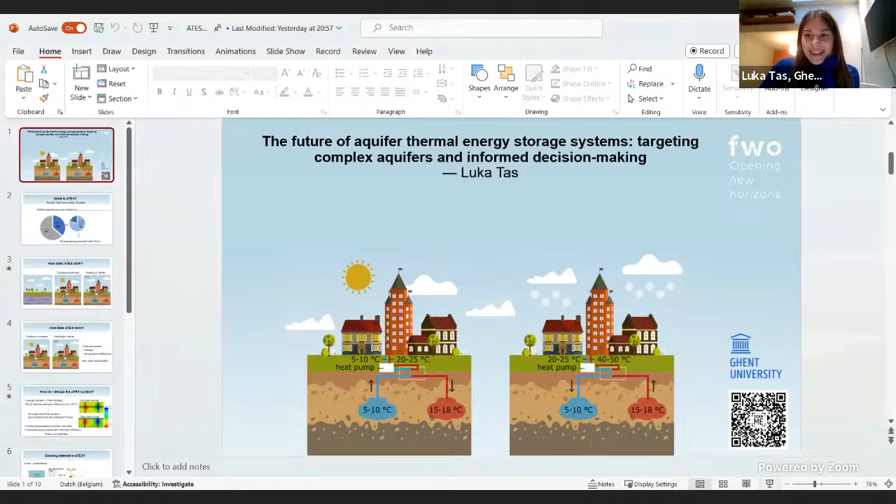Thank you, Anna, for introducing me. Can you see my screen? Yes, all right. So my name is Luka Tas, and today I want to introduce you to aquifer thermal energy storage systems and its future development.

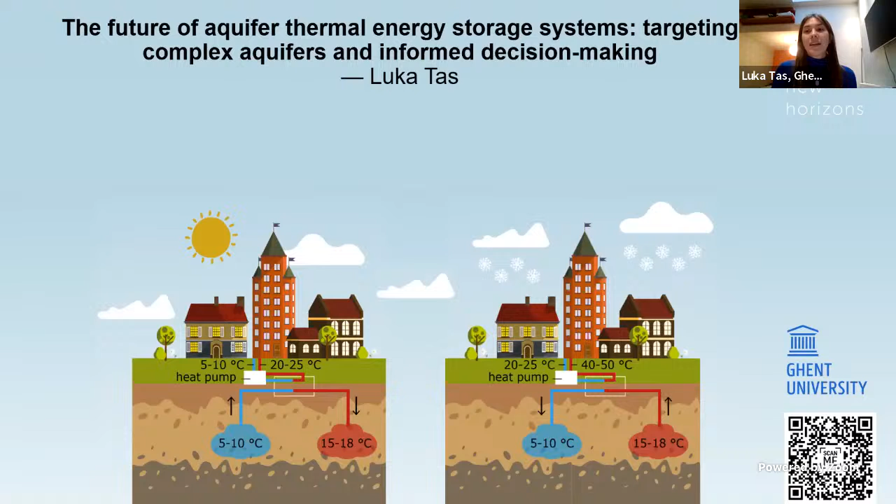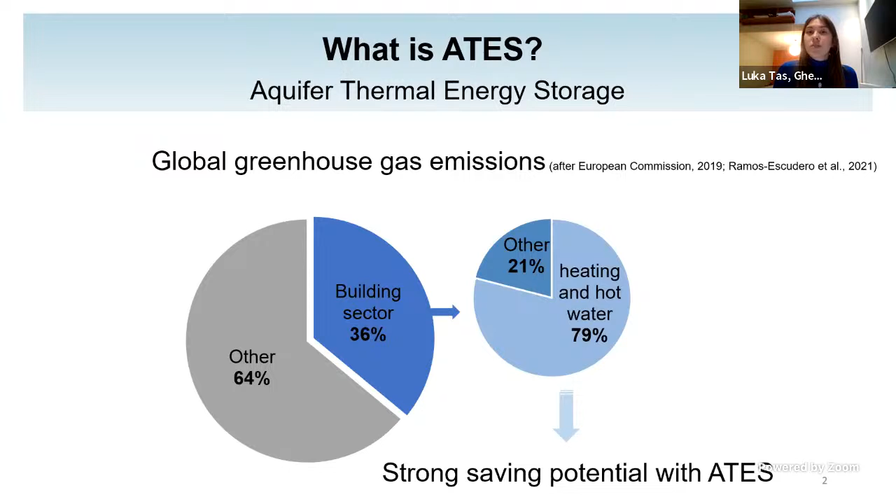First of all, we need to make sure we're all on the same page of what ATES, or aquifer thermal energy storage, actually is. ATES can provide heating and cooling to buildings in a green and sustainable way. Looking at the pie charts here, you can see that the building sector is responsible for about 40% of global greenhouse gas emissions, of which 80% is used for heating and hot water production. As you may know, the demand for cooling is currently increasing. Looking at it this way, you can see there's a strong saving potential if this thermal energy could be provided in a green way with ATES.

But how can ATES provide heating and cooling to buildings? Well, ATES actually uses the thermal energy of the groundwater present in the shallow subsurface, and with shallow, I mean up to about 200 meters depth. At this depth, the average groundwater temperature is about 10 to 12 degrees, and this is clearly not enough to heat a building. So with ATES, there's still something else at play.

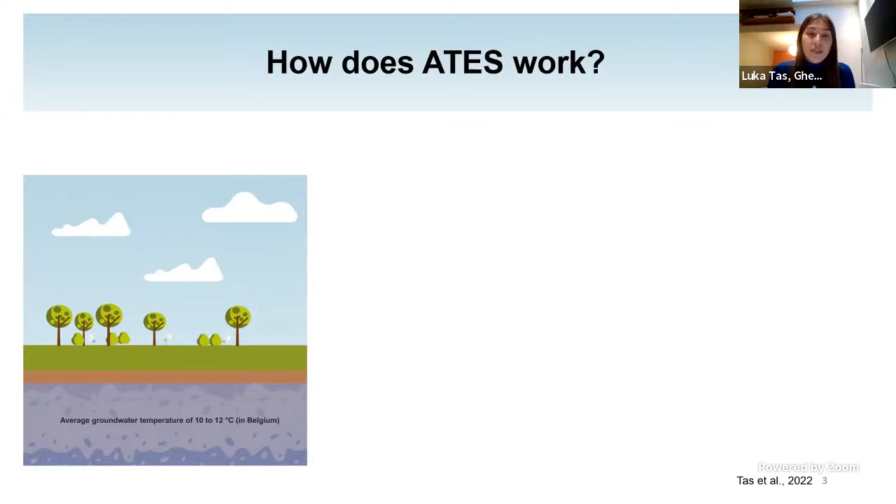ATES actually stores the thermal energy of the environment in the subsurface in order to use it when it's actually needed. To illustrate this, here you are looking at an ATES system in summer season, and in summer it's often too warm inside a building. So you extract water from the ground, and this water moves to the heat exchanger in the building. The water takes the heat from the inside environment, so the water warms up and the building cools down. This warmed up water is injected back into the groundwater reservoir, where you create a zone of warmer water.

In winter, the system is reversed to provide heating. You extract water from the warmer zone, taking advantage of the previously stored heat, and this water moves again to the heat exchanger. It gives its heat to the environment, so the building warms up and the water cools down again. This cooled down water is injected back into the aquifer, where you create a colder zone that can then be used for cooling in summer again. As you can see, the temperature of the warm storage area is still only about 18 degrees Celsius, and this is still not enough to heat a building.

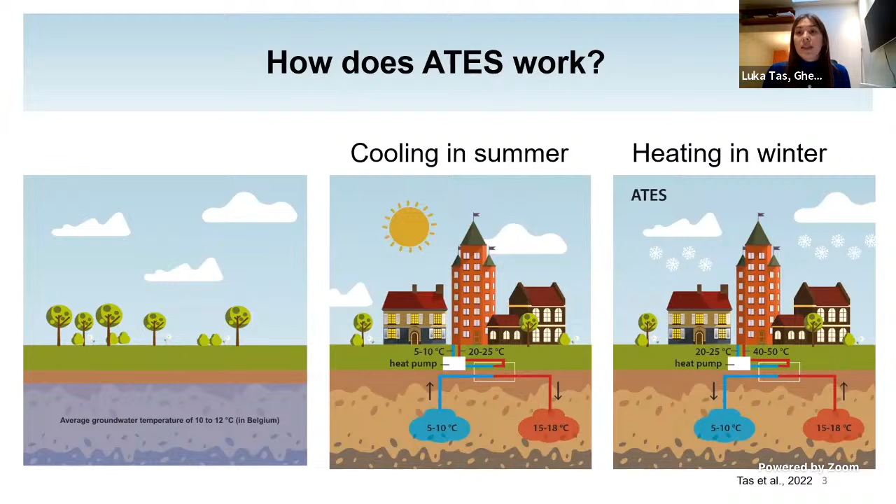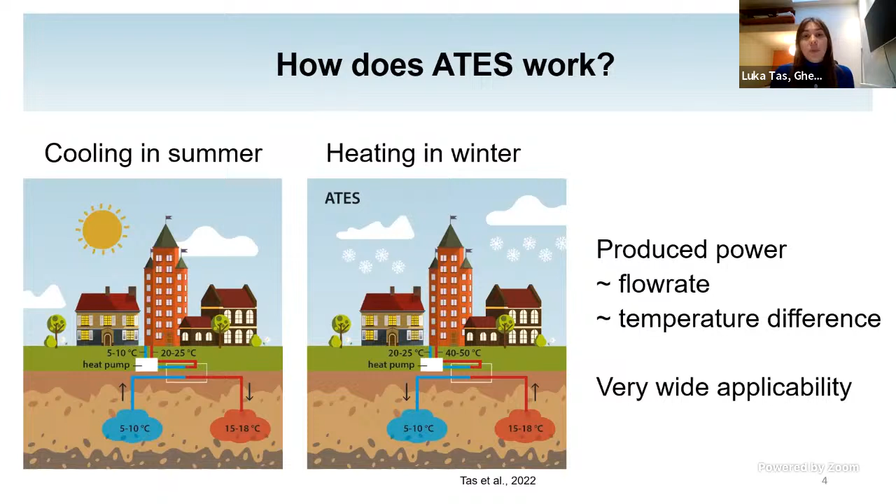There's also a heat pump in the system to further increase the temperature of the groundwater. With ATES, you can on average save about half a kilogram of CO2 per pumped cubic meter of water. The power you can generate with ATES is directly proportional to the flow rate of the system, so the amount of water extracted and injected, and also the temperature difference created in the subsurface. In general, for ATES it's sufficient to have a groundwater reservoir or aquifer in which you can pump or inject with a sufficiently high flow rate. This explains the wide applicability of ATES systems, and its great potential to mitigate CO2 emissions related to heating and cooling of buildings.

If you want to implement an ATES system in practice, it should always be first preceded by a feasibility study. The first thing you need to know is the energy demand of the building that needs to be fulfilled by ATES.

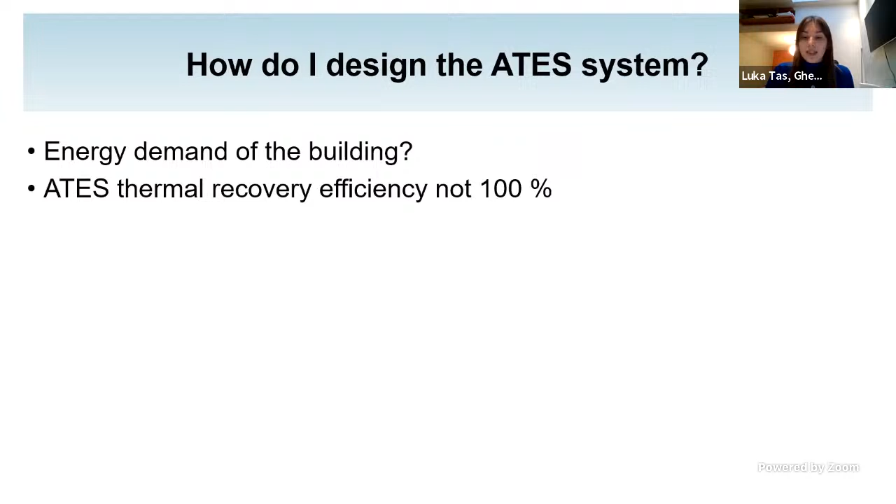Second, it's very important to take into account that you store groundwater at a certain temperature in the subsurface, but you won't be able to recover all of this thermal energy again. This is because groundwater flow and conduction, for example, cause the heat and cold to move away from the storage sites.

Therefore it's very important to know the groundwater flow and transport processes in the aquifer very well. This is why, often during a feasibility study, a three-dimensional model is created. This model is a representation of the study site with its hydrogeological and thermal transport parameters. It can then serve to simulate an ATES system for the desired length of time, and predict the temperature evolution with time. With this prediction, you can also calculate the expected power output of the ATES system and the thermal recovery efficiency.

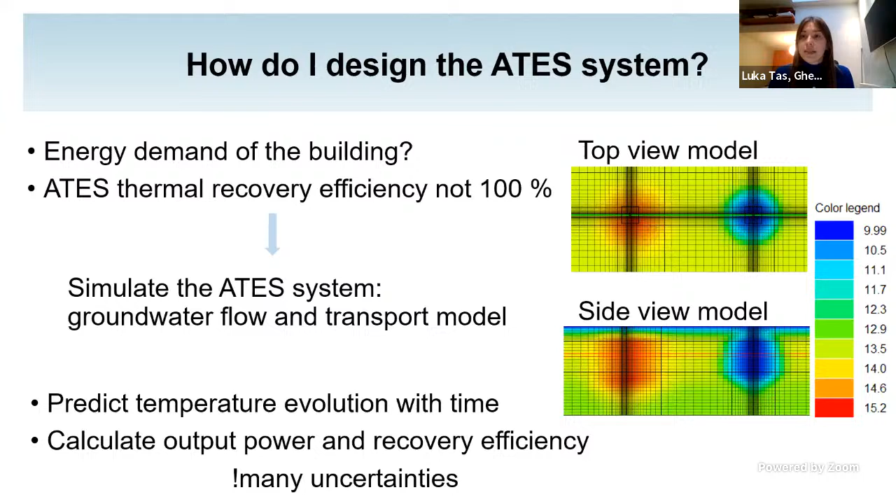Despite the apparent simplicity of making such a model, it's a very challenging and time-consuming task to make models that actually give reliable and realistic predictions, and there are also many uncertainties involved.

Despite these challenges, there are already many operational ATES systems in the world, so for the interpretation of results you can often also rely on experience. Most operational ATES systems are located in thick, productive aquifer layers because these are the most promising areas. This also explains its prevalence in the Netherlands, which is typically characterized by this kind of aquifer.

However, in many other European countries there are more complex aquifers, which are more at the limit of suitability for ATES. Because the potential for ATES has already been extensively proven, and as we're still facing challenges to provide our energy in a green and sustainable way, there is currently a tendency to also target these more complex aquifers for ATES. This is also aided by government incentives to invest in green energy, and by rising energy costs, which favor investment in ATES systems.

Because more and more ATES systems are coming, this brings its own challenges for the future. First, I want to talk about competition between systems. When you have more and more systems in a certain area, they could be placed too close to each other, and this might cause interactions between individual ATES systems, which is potentially detrimental to the efficiency of each system.

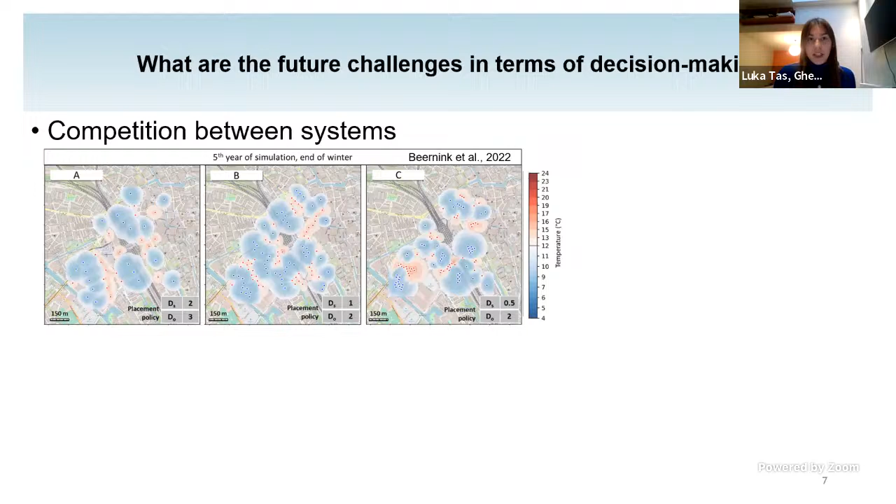This is something that's actually already encountered in the Netherlands. So in the future it's very important to take this into account and develop some kind of legislation so that we can optimize spacing between individual ATES systems, to avoid this competition and also encourage district heating plans.

If you want to target more complex aquifers in the future that are at the limit of suitability for ATES, you need to take into account that the risk of failure is significantly higher. Then it's not enough anymore to rely on experience when designing the system, but better informed predictions should be made. However, the current methods in industry have poor predictive capacities and are unable to estimate this uncertainty.

In practice, often a field test is carried out, and you try to fit your model output with this field test by adjusting your model parameters. This is called a deterministic calibration. However, there are some issues with this approach, because it does not take into account that the field test is only representative for a small part of the study area. It also does not take into account that multiple model realizations with different parameter distributions could actually fit this field data.

To be able to move towards models in the future which can serve for real risk assessment, we need to develop methods that have better predictions while also acknowledging uncertainties that are present. At the basis of these new methods will probably be stochastic approaches, where you explore the entire ensemble of different solutions. To illustrate this, here you're looking at model output showing temperature evolution with time for two cycles of an ATES system.

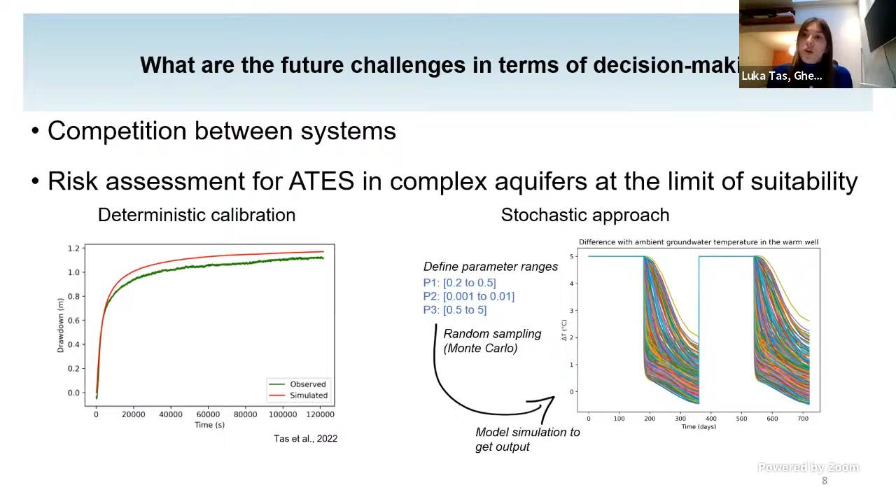With further statistical data analysis, you can then make more accurate long-term predictions, also taking into account the short-term field data, while still having an idea of the uncertainty that is present.

Finally, I want to talk about the increasing complexity of data and models expected in the future. As I mentioned, there are already many operational ATES systems in the world, and a lot of them have a lot of monitoring data available. The challenge in the future lies in how to use all of this data to optimize future new ATES systems, in order to reduce the cost of the initial feasibility study of new ATES systems.

So that we can promote the further use of ATES in the future. Also, if we want to use more stochastic approaches in the future, this will also increase the complexity of models and data. I expect that the methodology with which we solve prediction problems in earth sciences will evolve along with this in the future.

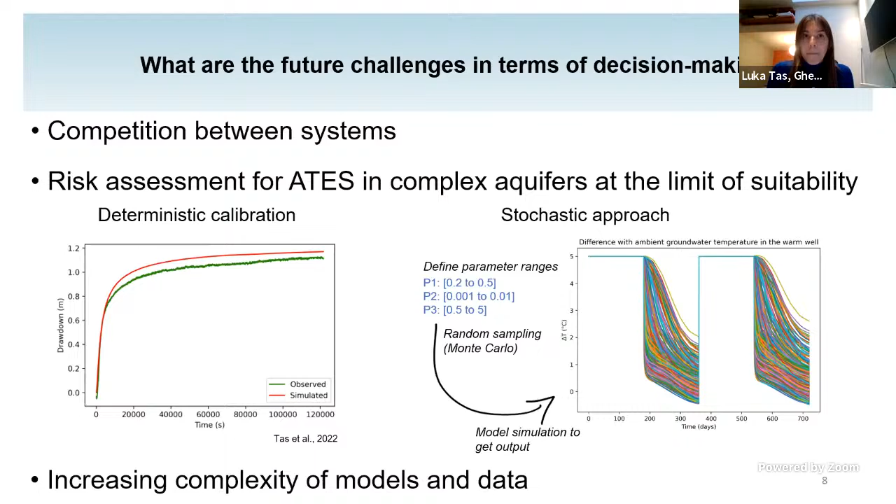To end this presentation, I would like to emphasize that decision-making should always be based on sound scientific approaches. As our research about ATES systems advances, we should take into account that there's still a gap between science and practice that we should try to bridge in order to actually make a real difference in practice.

Here are still the references. Thank you for this presentation and for your attention.

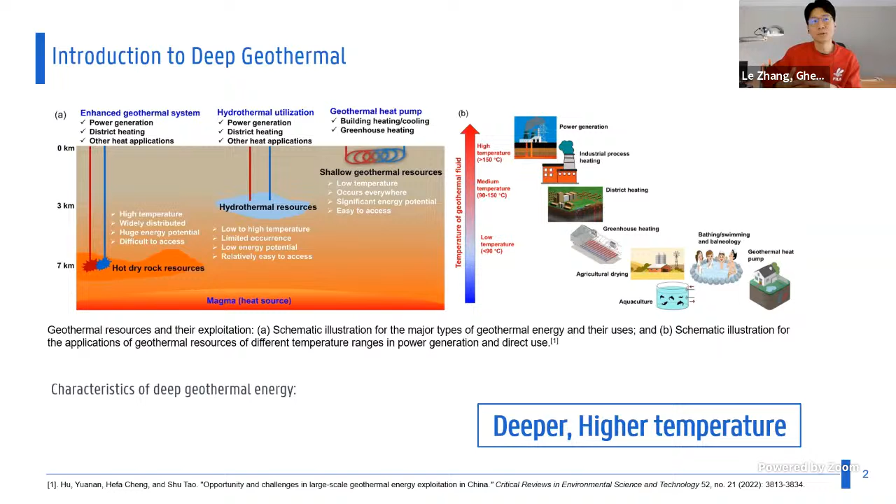Generally, geothermal energy can be categorized into shallow geothermal and deep geothermal. Deep geothermal includes deep hydrothermal resources and also ultra-deep geothermal, such as hot dry rock resources. As shown in this figure, you can see two very significant characteristics of deep geothermal: they are deeper and have a higher temperature. These two types of deep geothermal differ a lot between the hot dry rock resources and the hydrothermal resources, mainly due to underground water, because the heat transfer medium is usually water in the geothermal system. So the hydrothermal systems have naturally high temperature reservoirs.

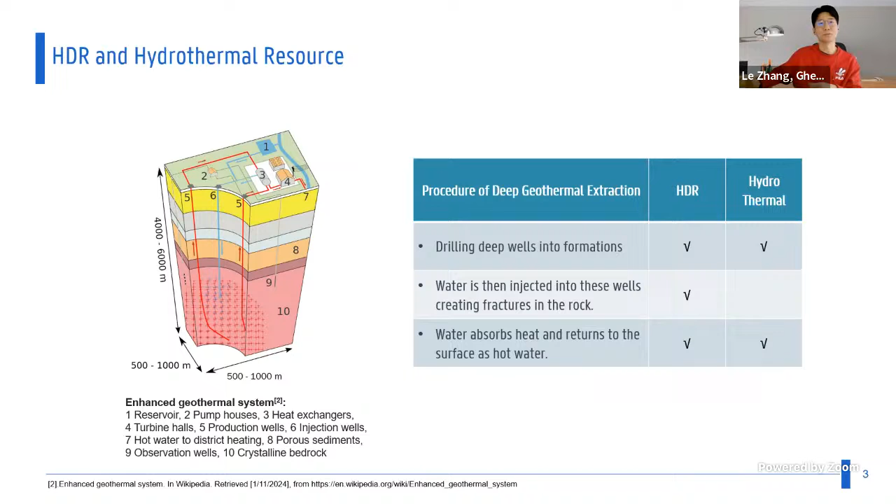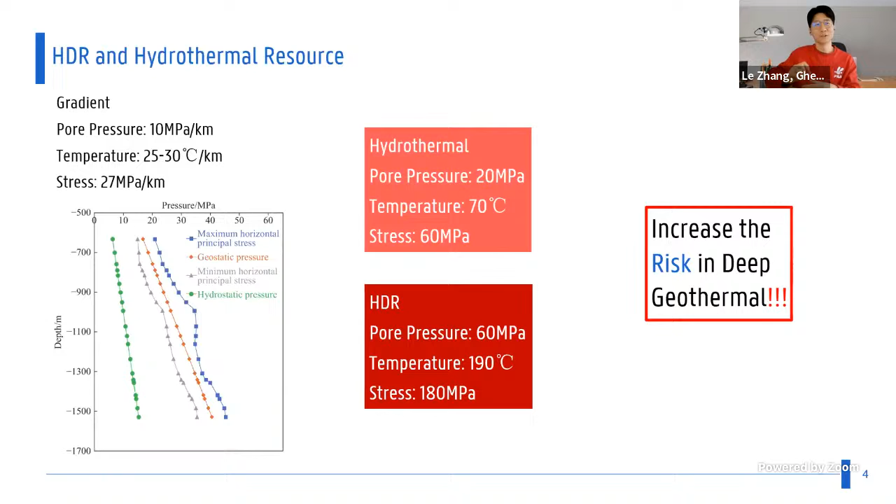In the underground and deep geothermal, we need to consider the complex physical environment of the reservoir. We all know the deeper, the higher the temperature, also the higher the pressure and stress. The injection of cold water during geothermal extraction will always disrupt the original physical balance of the environment, and normally it can increase the potential risks.

In deep geothermal, the temperature, pressure, and stress in that environment are always interconnected. We call it the thermal hydromechanical coupled effect. The risk always comes from the mechanical response of the reservoir. Normally, both the decrease of temperature and an increase in pore pressure can reduce the effective stress within the reservoir. In rock mechanics, we use a Mohr circle to represent it.

If the stress in the reservoir shifts but does not reach the yield surface, then it can be considered safe. However, if the stress exceeds the yield surface, especially in the presence of faults, it can lead to a very big risk.

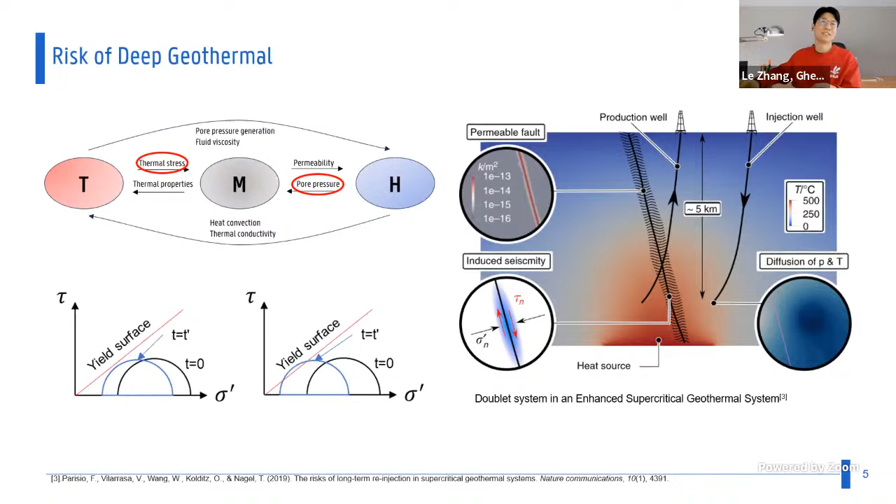So what's a very big risk? The answer is earthquake. Seven years ago in Pohang, South Korea, a 5.5 magnitude earthquake occurred. It's the largest and most destructive earthquake ever associated with an enhanced geothermal system. This event led to the complete shutdown of the EGS project there, and it was considered a potential game changer for the global geothermal industry.

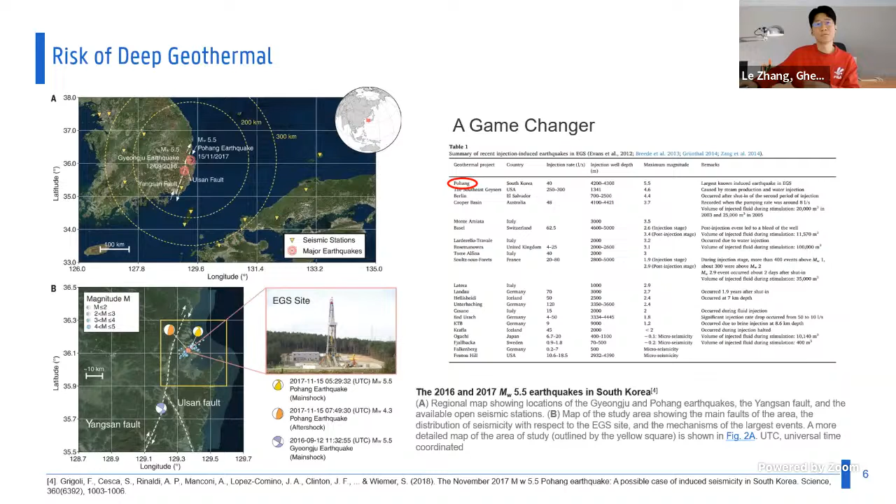Now we have enough information about deep geothermal, especially the risks. Now I'm going to move forward, and I would like to introduce a new concept. How can we extract geothermal energy in deep mines?

In theory, extracting energy in deep mines, especially the geothermal system beneath the existing mining system, can be a mutually beneficial situation. On one hand, the geological data from existing mines can be a reference for geothermal, and the shaft and tunnel can reduce the cost of geothermal drilling.

On the other hand, the injected cold water can help cool down the mining areas, controlling the heat hazard. So for this conceptual system, our primary concern still remains the safety and stability of the system, as we previously discussed - safety is always a fundamental requirement of a system.

Given that deep mine environments are often around 1 kilometer underground, in this system we are dealing with hydrothermal resources - we don't think about the hot dry rocks. So the likelihood of induced earthquakes is nearly zero, but we cannot ignore the impact of the mechanical response from the geothermal system on the stability of the mine gallery.

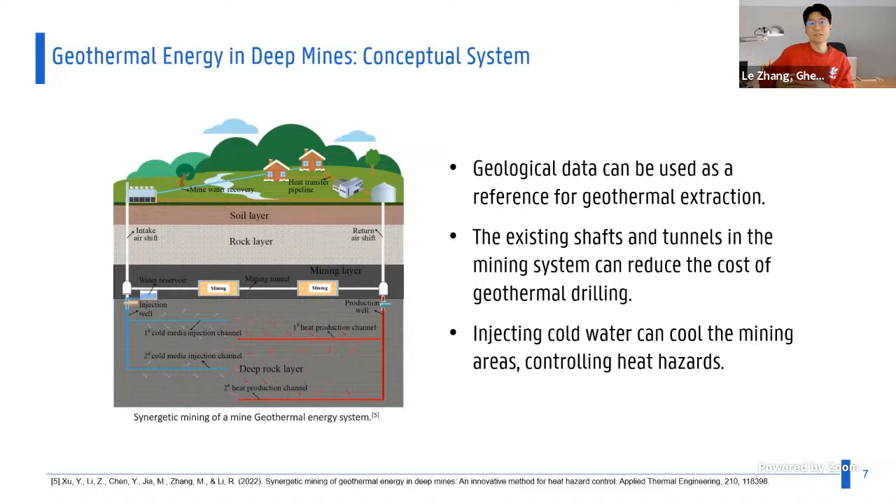So if we want to design this conceptual system, we have to pay a lot of attention to the stability of the mine gallery, also the temperature of the gallery to check the cooling effect and the production temperature. Then the next question is, how can we connect the reality with the conceptual?

We can employ the most commonly used method in geothermal research, the numerical modeling. A successful numerical model is like a calculator. You provide the model with the information you have, which includes a lot of parameters. In this model, it should include the thermal parameter, hydraulic parameter, mechanical parameter, and the design parameter.

There are a lot. And in return, the model will provide you with the answer you want, which includes the gallery stability, the gallery temperature, but also the production temperature about the project. It's quite a straightforward method.

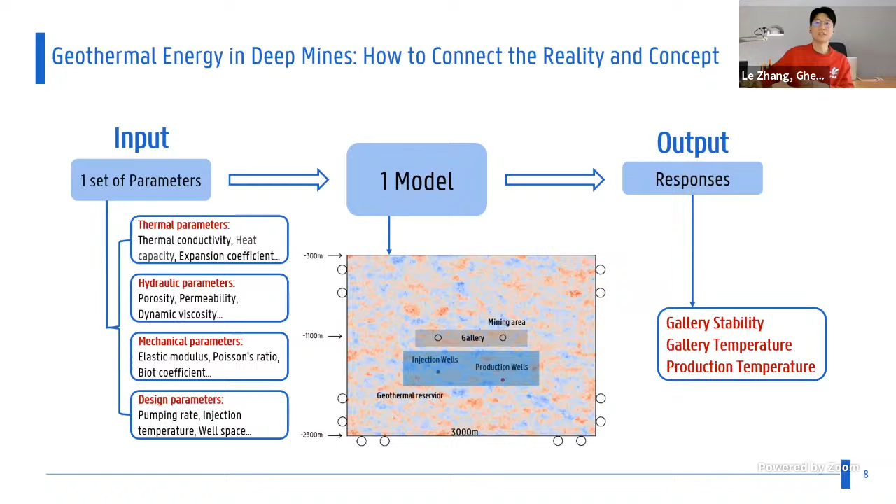But in reality, we want to use a model to give a suggestion for decision making, such as determining the location and depth of our geothermal system - where and how deep we can build it to make the best decision. We always have to face a big challenge.

It's still the uncertainty. In numerical modeling, we deal with a lot of input parameters, each with a range of values that can influence the responses. The key question is how to select the most appropriate parameter range to make an accurate decision and achieve the desired results. This is our primary concern.

Therefore, I'm going to introduce a simple approach to addressing this question and making the best decision. Instead of relying on just a single model, we increase the number of models to X. X could be hundreds or thousands, it depends.

Within the range of possible values for each parameter, we can select X sets of different model inputs. Then we run the model X times for the stochastic simulation. We generate a large number of responses. Among these responses, some galleries may remain in a very stable situation.

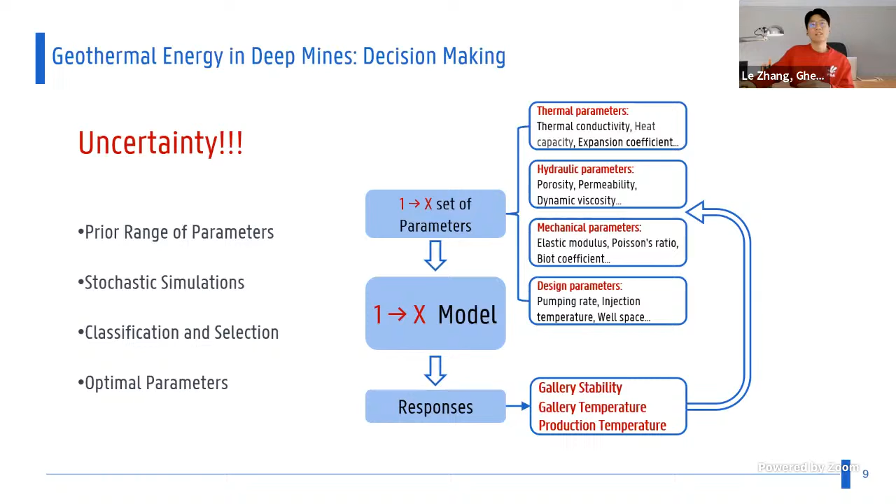This approach is quite straightforward and simple, but it is computationally intensive. We also employ some machine learning methods to optimize the deep geothermal model in a faster and simpler way. If you are interested in the method I'm doing now, please feel free to contact me by email. Thank you very much for your attention.

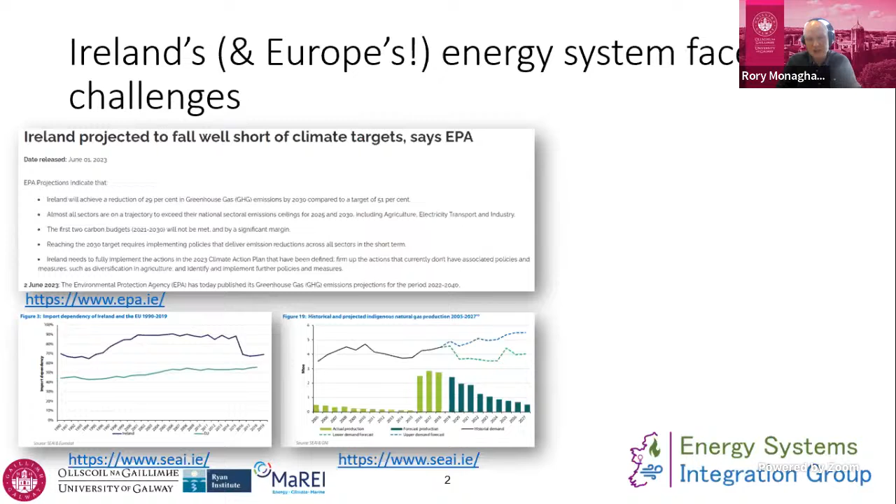We're all behind on meeting our emissions targets. We are all trying to deal with issues around the security of energy supply. These graphs show the quantity of energy used in Ireland and Europe that is imported. We've got projections for Ireland for how it might continue into the future. We are very exposed in Europe, but extremely exposed in Ireland because we have traditionally virtually no fossil fuel resources. We've also had issues over the last couple of years with the physical security of supply, growing energy demand, and relatively stagnant—or in some countries falling—energy supply.

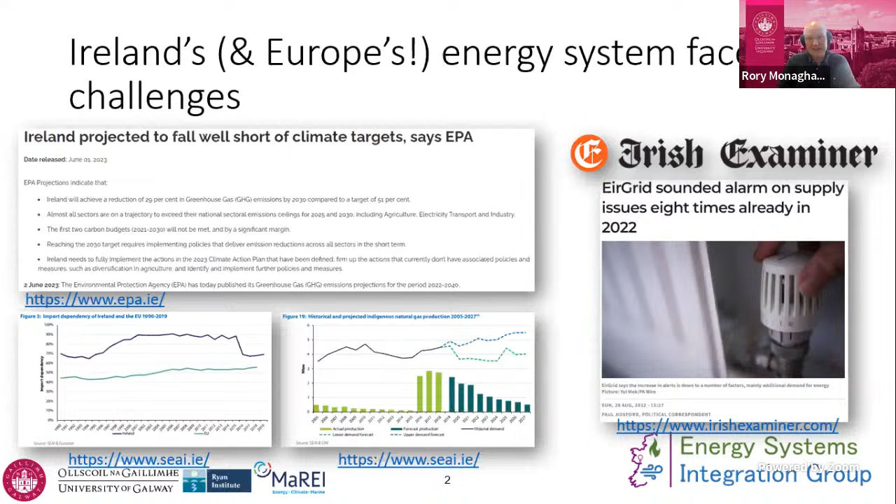So how can we aim to address all of these issues that really are very important for society and for the economy as well? The first, most important, and cheapest route to decarbonizing our energy system is simply to use less energy.

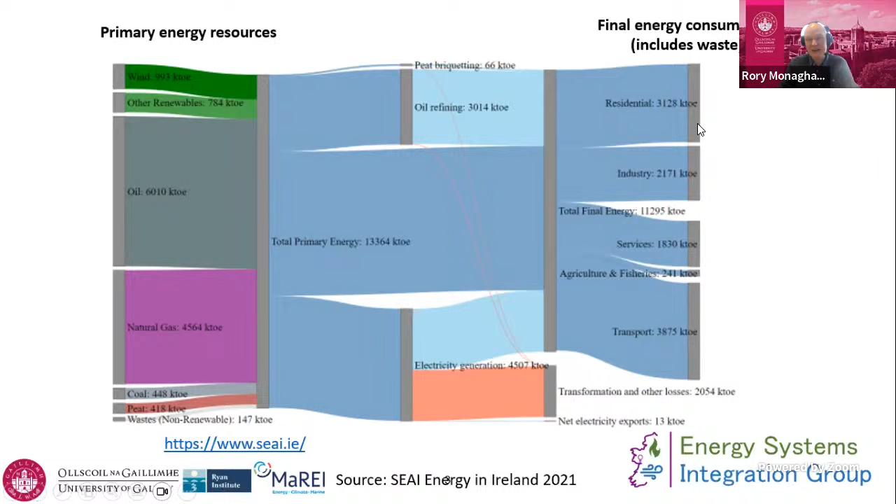This is a Sankey diagram showing the flow of energy from raw materials on the left-hand side to end uses on the right. The problem with these end uses is that most of the energy flowing into them in our economy is wasted. The majority of energy used for transportation is wasted because combustion of fuel in cars is an inefficient process. We can say similarly for houses, industry, and other types of energy use. So if we can improve the efficiency of energy use on the right-hand side of this graph, we have to bring in less energy resources on the left.

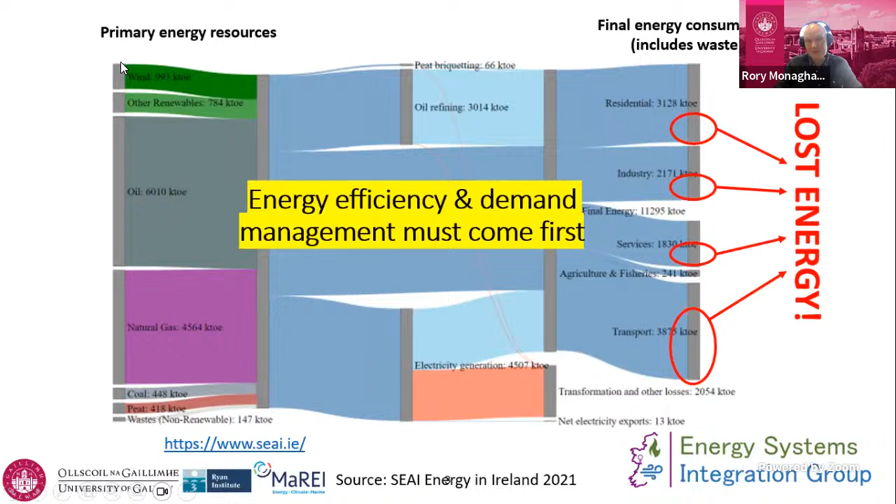We need widespread electrification of as much as we can, as quick as we can. The two obvious routes for electrification are electrification of home heating and cooling through the use of heat pumps, and the electrification of small-scale transportation through the use of electric vehicles. And we have seen that they have started to make a real impact over the last few years.

We also need, if we are building up these uses of electricity—because the reason we are talking about electrifying is that we have seen it is easier to decarbonize electricity supply than it is to decarbonize other elements of our energy use. So if we use more electricity, we need to generate more electricity. And that means, certainly in the part of Europe where I'm based, using more wind energy, using as much solar energy as we can get our hands on.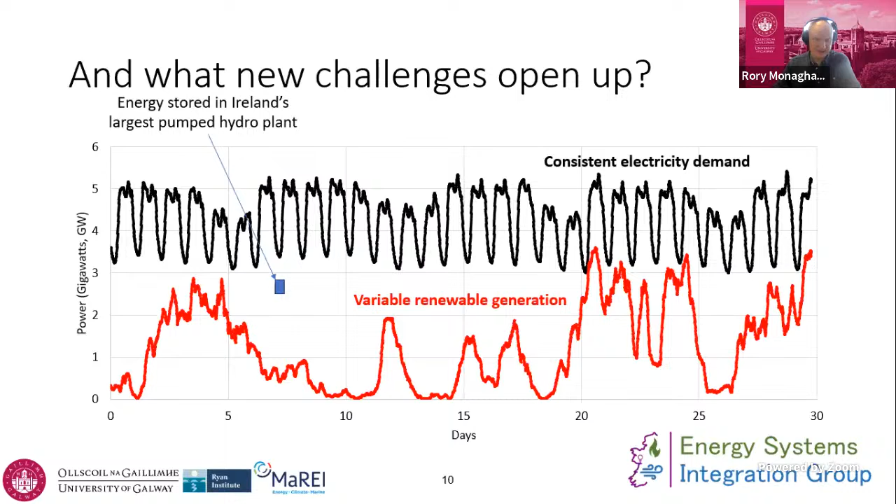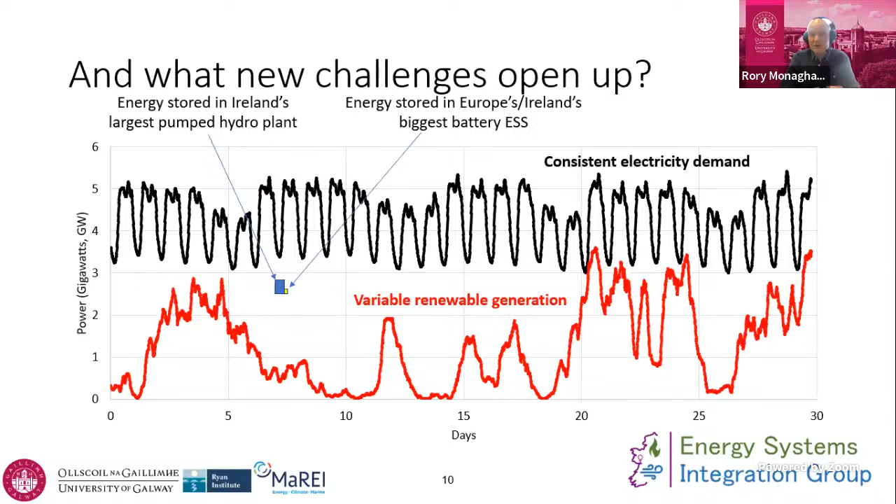And this maybe will focus minds even more. This is the largest battery storage plant in Europe, which was built in Ireland a couple of years ago, and it is an even smaller amount. So while batteries are extremely important in balancing instantaneous supply and demand on the grid, they are not very large energy storage sites. So how can we address these problems that are going to come online as we move to a zero carbon energy system?

Well, green hydrogen is potentially a missing link to this. Green hydrogen involves the use of renewable electricity to split water in a device called an electrolyzer, to transport that hydrogen to where it's needed, either through pipes or through ships or through trucks. And the fact that we have a chemical means of energy means that we can store that energy from times when we have the renewables to times when we don't.

Because the thing with energy demand is that we generally have no say in when energy gets used. Energy is used when it's needed. Now, that can be controlled to some extent by demand management, but it can't always be. So once hydrogen is produced and stored, it can be used across a number of different sectors to decarbonize.

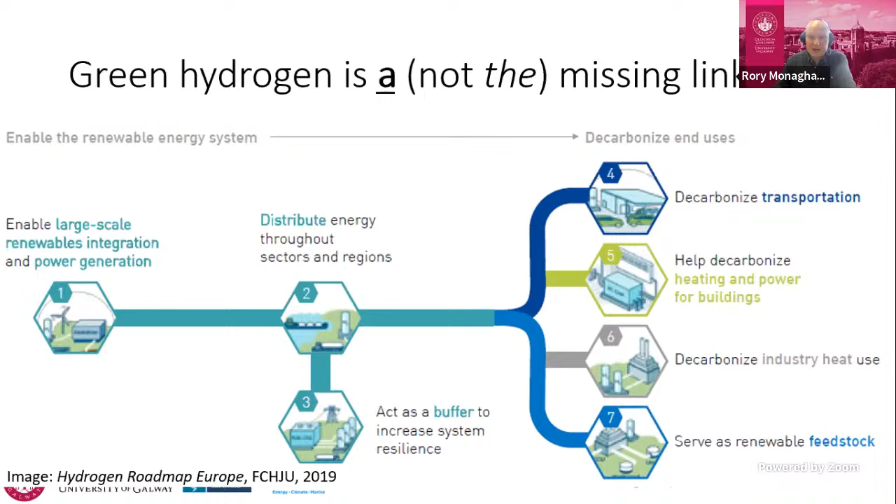So we've done some work over the last few years trying to quantify this, and we've been coming at this from an Irish perspective. The results are comparable to other countries, but maybe not directly so.

We envision that by 2050, about 8% of the electricity generated in Ireland could come from hydrogen burned in gas turbine engines, the same type used to generate power right now from natural gas. About 12% of heating could come from hydrogen in Ireland.

In transport, there's a mix of different options. We're projecting very small use of hydrogen in private cars, but larger use in harder to decarbonize sectors such as shipping, trucks, and heavy duty public transport.

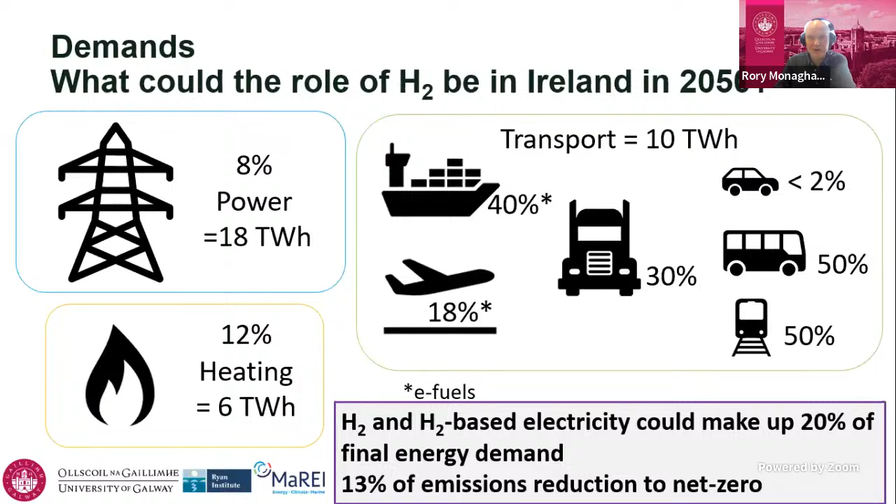We've also started looking at how hydrogen can fit into our electricity sector. Returning to our pumped hydro storage site represented in blue and our battery storage site represented in yellow.

Ireland and the Northern Irish government are jointly starting to investigate whether hydrogen could be stored in a geological salt cavern structure in Northern Ireland that could store energy for the entire island of Ireland. The minimum estimate of how much energy could be stored in that cavern is shown by this blue box.

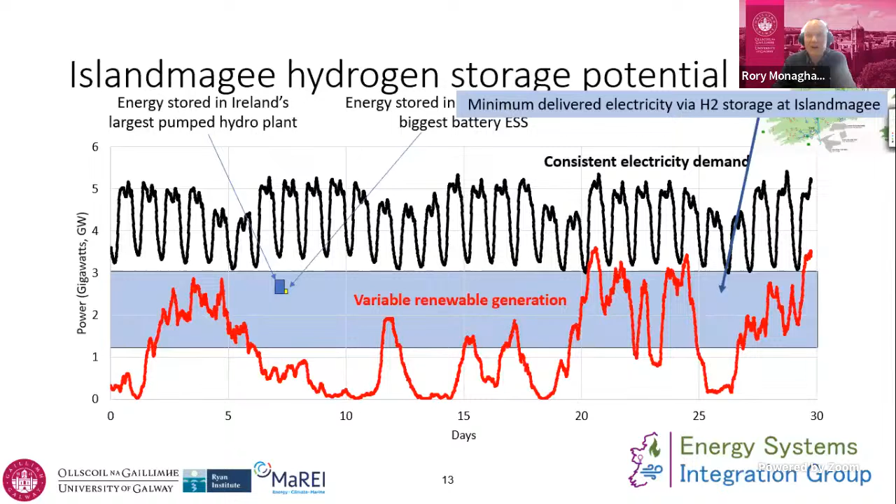It's orders of magnitude larger than the amount of energy currently stored in our pumped hydro plant or in our large-scale battery storage plants. So there is a huge potential storage resource out there for hydrogen in geological settings.

One of the issues with hydrogen is that we currently don't use it much as an energy resource. It's used in certain industries, but those of us working in hydrogen are now having to consider both the supply and demand of hydrogen together, bringing these on stream together.

This is currently being promoted through the use of hydrogen hubs or hydrogen valleys. This represents work we've been doing with the Irish government and Northern Irish government on linking up potential areas of supply, for example where we have large-scale renewable resources, mostly at coasts, with where we could potentially use hydrogen—in industry in Ireland, cement production, and power generation.

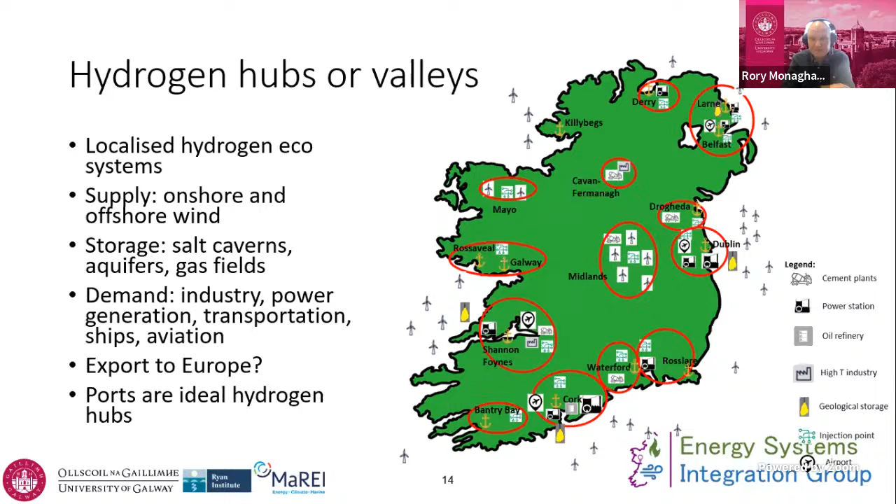We're also looking at how Ireland can connect to become an exporter of hydrogen to Europe. One route is the European Hydrogen Backbone, a pan-European project to convert the current natural gas pipe network into 100% hydrogen piping networks.

This wouldn't be to deliver hydrogen into people's homes, but for moving large-scale amounts of hydrogen from areas of production, where the renewables are, to areas of demand, where we have heavy industries. With a network like this, we'd envision hydrogen produced by wind in Northern Europe and by solar in Southern Europe, moved by pipelines to the central hub, the industrial heart of Europe.

What I want to finish this presentation on is to say that we're aiming to do that right here in Galway, on the west coast of Ireland. We've received funding from the European Commission to build what's called a hydrogen valley.

We're aiming to produce hydrogen at a wind farm here in Ireland and use that to power hydrogen-powered intercity buses and trucks, and eventually boats and small aircraft serving the islands off the west coast of Ireland. This project started just this month, and we'll be running it for 5 years. We hope to keep everyone updated on how it goes as we try to decarbonize these really hard to decarbonize parts of the Irish economy.

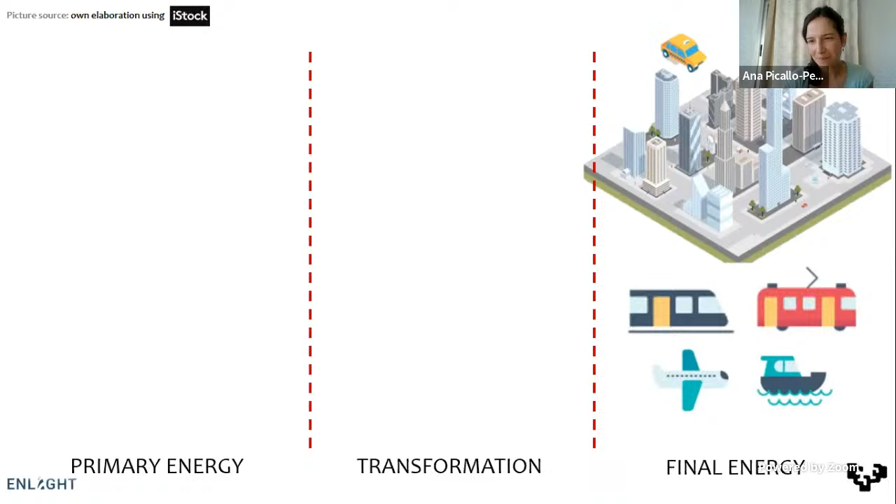The energy that we use is called final energy. And as Rory already showed us in the Sankey diagram, the three main consumers are buildings, transportation, and industry. All that final energy that we use in buildings, transportation, or industry comes from primary energy obtained from natural resources, which can be divided into renewable or non-renewable resources. In between primary energy and final energy, we have power plants, transformation plants, which take the primary energy and convert it into the final energy in the way we use it.

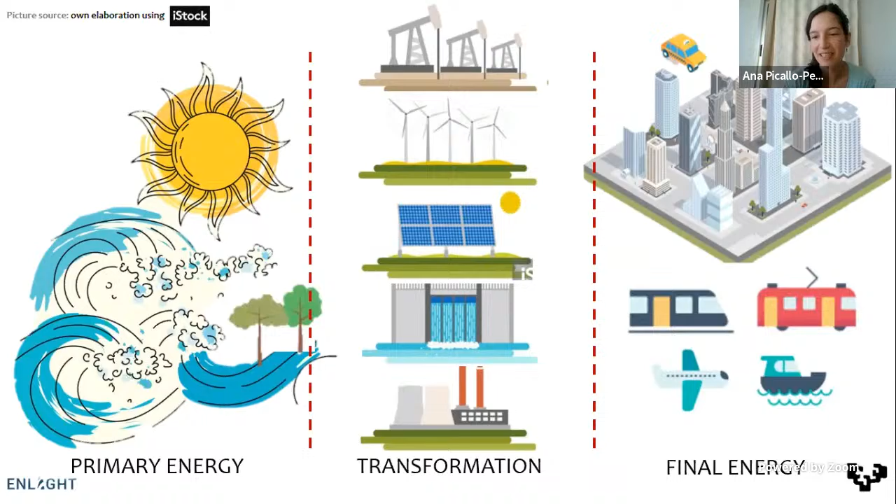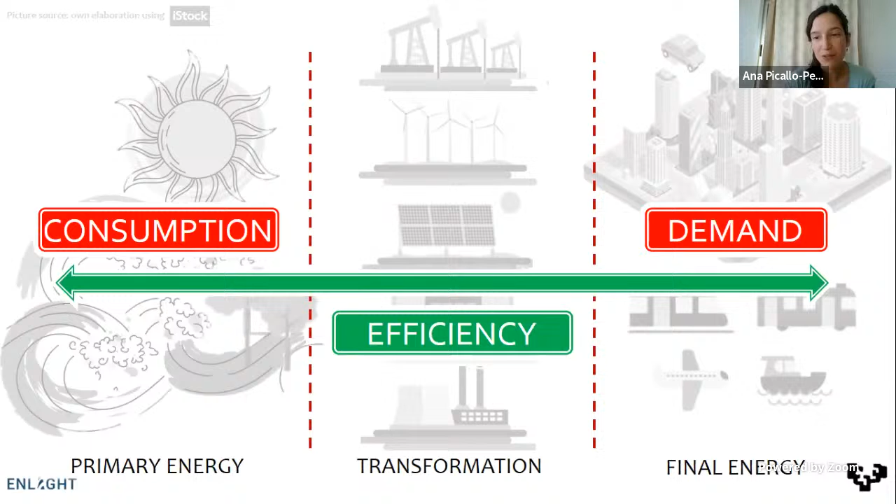So it's very important to define the difference between the demand that we need for our use and the consumption of natural and primary energy. In between both of them, what we have is the efficiency of the energy transformation itself.

And what should we do? As Rory already says, the idea is to decrease the consumption of natural resources in order to decrease non-renewable resource consumption, because the depletion is something commonly known, and everybody knows that we need to decrease that consumption in order to contribute to a zero or neutral CO2 emission world and a more balanced world.

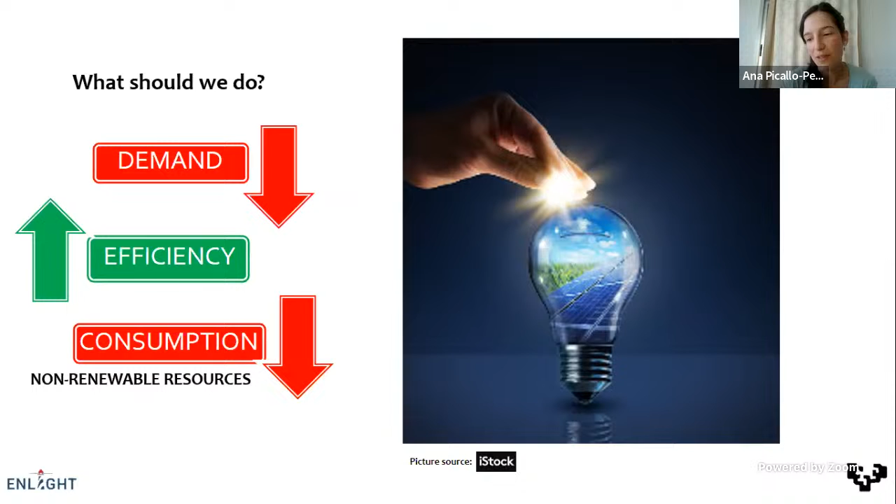According to that, in order to reduce consumption, we need to reduce our demand, our habits, our energy consumption profiles. But many times the demand cannot be decreased at all, and instead we are increasing it. So once we decrease the demand as much as possible, the other way to decrease consumption is to improve the efficiency of the energy transformations.

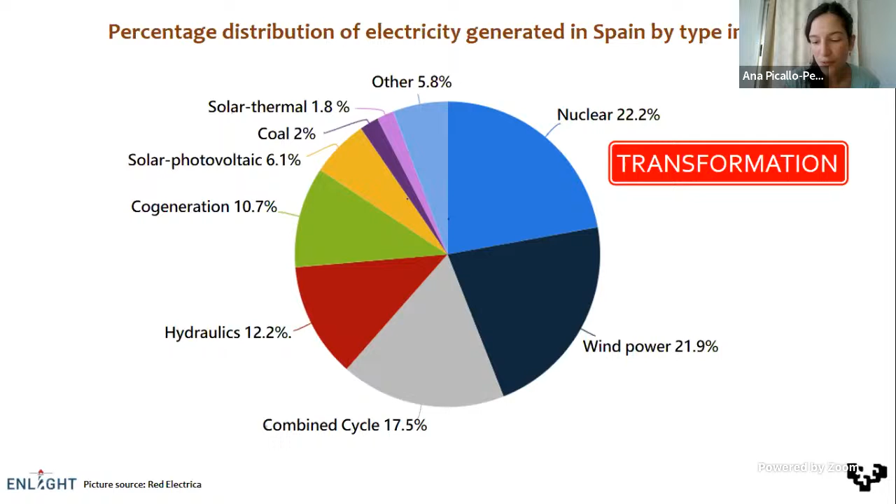This slide only shows the percentage distribution in Spain by 2020, according to the energy mix of that moment. As we see, almost a fourth was related to nuclear power, and then wind, solar, and hydraulic renewable energies contributed to creating the electricity at that moment.

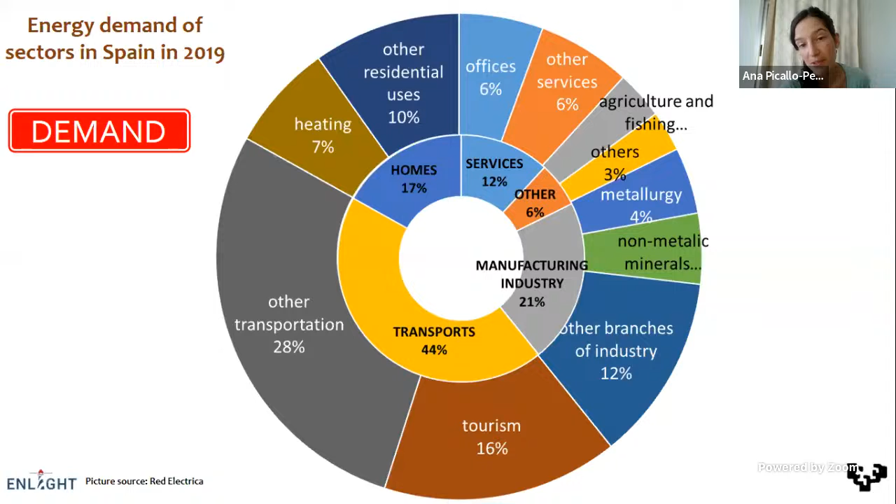But according to the demand, the Spanish demand in 2019, the main consumers were industry, transport, and homes and services. This picture is similar in Europe. As in Spain, the city's final energy requirement, meaning homes, buildings, and the tertiary sector, is almost one-third part. In Europe, it accounts for 40% of the total energy consumption.

Therefore, we need to lower this kind of demand. According to buildings itself, which are the energy demands? It's commonly known that we have heating demand and electricity demand. Heating demand includes heating requirements in wintertime and refrigeration in summertime, more so now that global warming is so high.

We also have energy demands for ventilation. Ventilation is an energy demand that requires a lot of energy, since we throw out the already acclimatized indoor air to the outside and take clean air from outside. We need to pay again to acclimatize it, but this is very important now, especially since we have already lived through a COVID-19 pandemic.

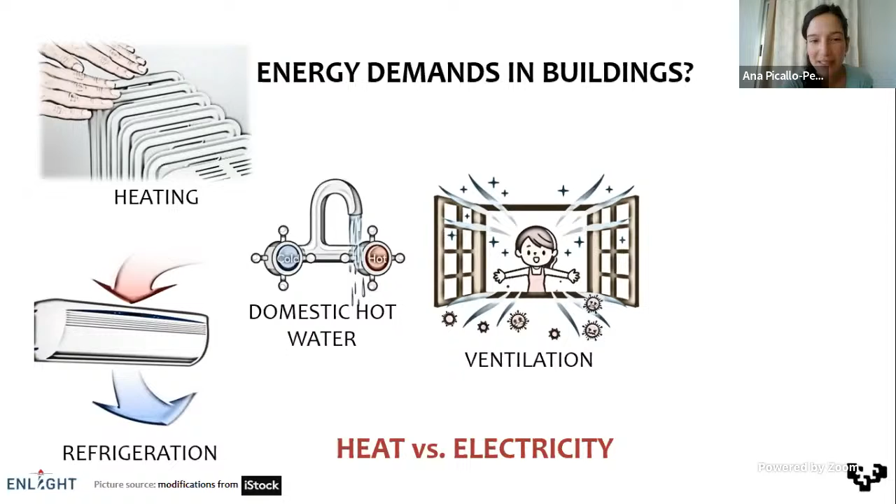And the last main demand in buildings is domestic hot water for sanitary demands, for kitchens and toilets. The electricity demand covers the requirements for electrical devices or lighting.

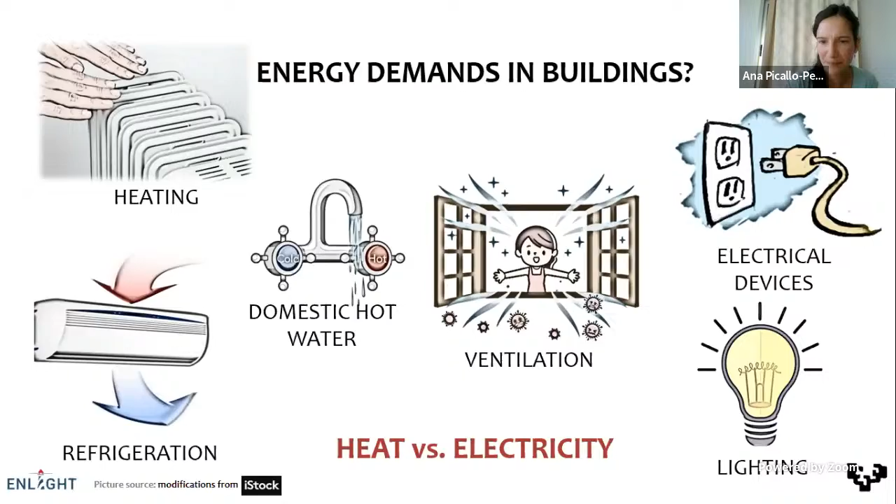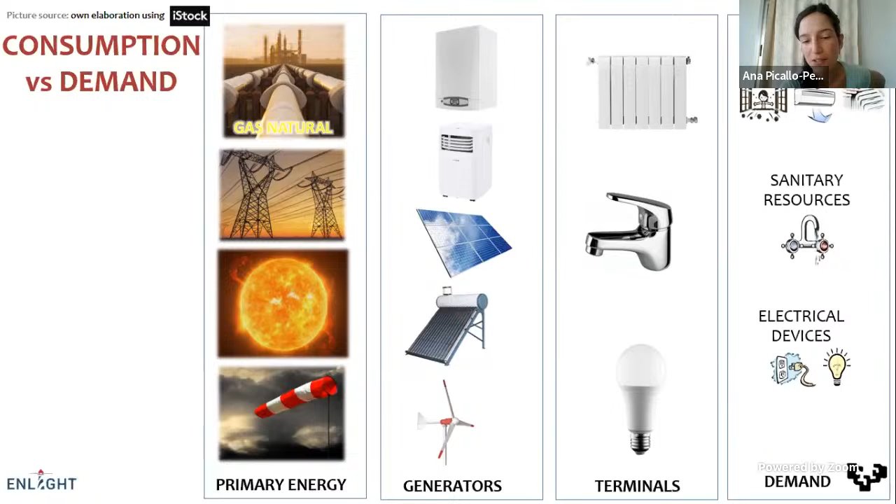As I already said, this demand is covered by the consumption of primary energy. However, that demand is supplied through terminals—they can be heaters, radiant floors, taps for water, valves, or other kinds of terminals for electrical devices. And the energy to supply the demand in those terminals comes from engines, from the technology called generators.

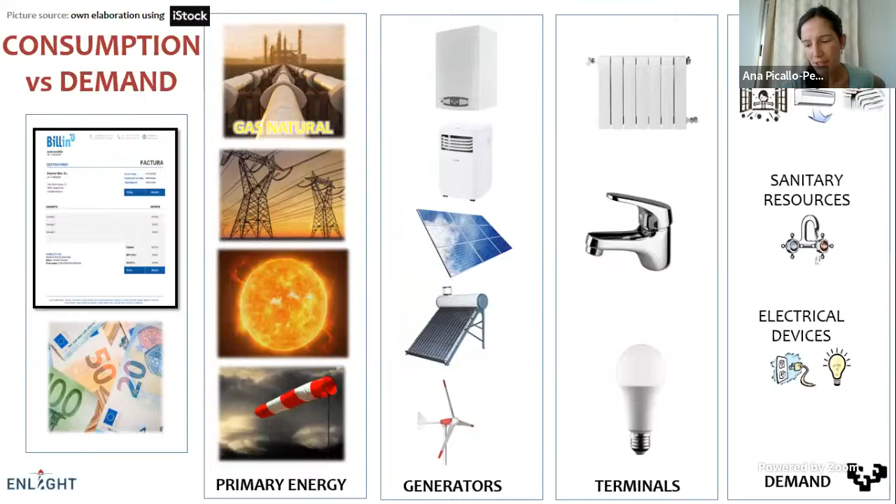It's important to know that the bill we are paying for is for the energy used to supply the generators. Therefore, we have two different efficiencies: the total efficiency of the energy change from consumption to demand, from the primary energy to the use at homes.

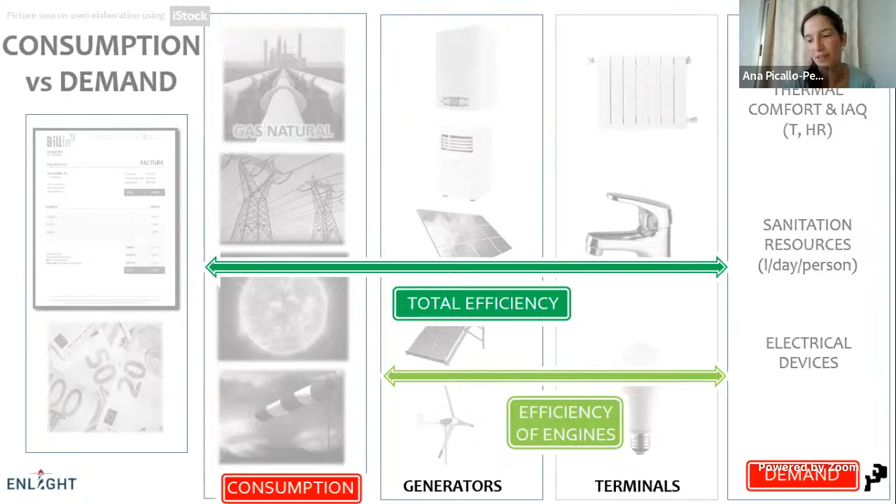But we also have the efficiency of the engines themselves, and those kinds of efficiencies are required to be as high as possible. It's important to say that more than 65% of primary energy is lost in the conversion to useful energy, as Rory showed us in the Sankey diagram.

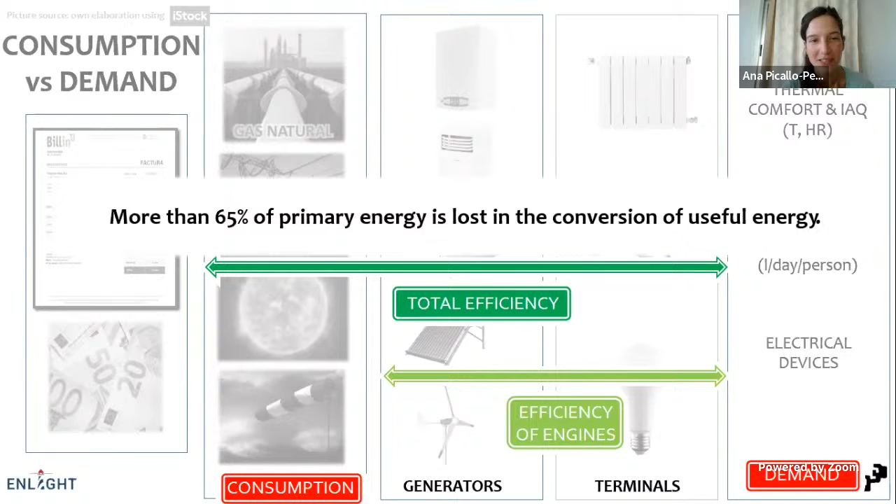Speaking about technologies, I think everybody is familiar with this kind of label. This is the energy label which any engine needs to have if it's consuming energy. It's an intuitive level: if you have an engine that consumes the average energy that kind of engine consumes, for example a fridge, it will have a D level.

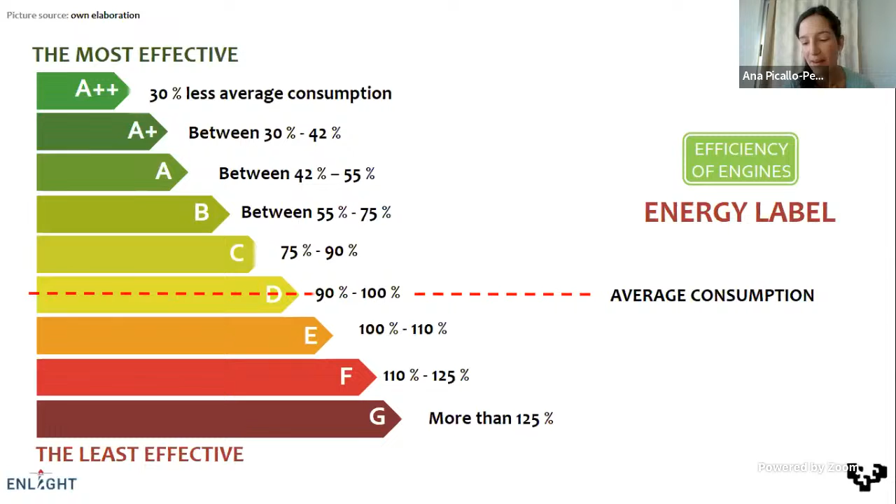If it consumes 40% less than the average one, it will be an A+, and if it consumes more than the average one, it will be, for example, an F. So the idea is to have the most effective technology possible, but it's also very important to use renewable resources to supply that energy to those engines.

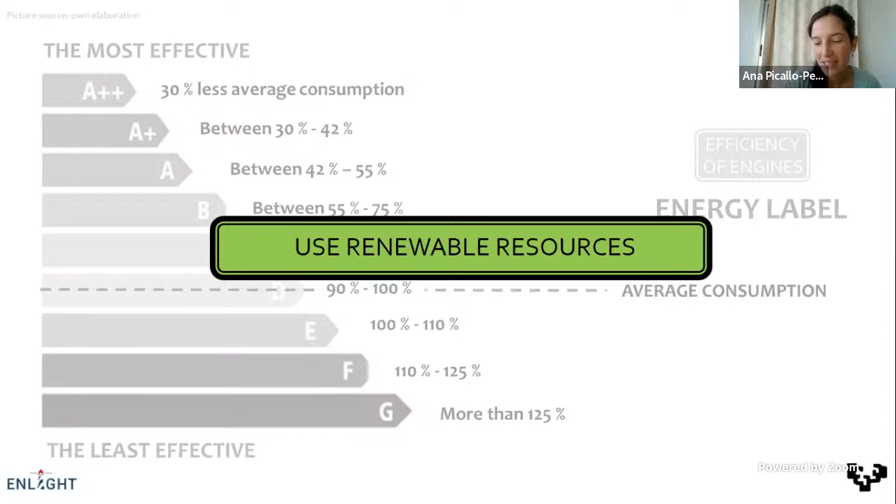As Luka also showed us, with heat pumps supplied by geothermal heat.

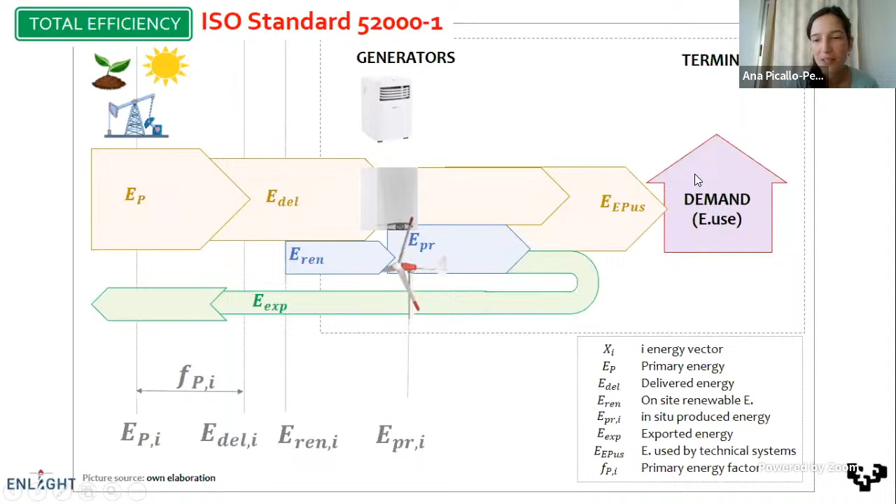This is a picture taken and adapted from ISO standard 52000-1, which explains how we can calculate all the transformations along the energy chains from the primary energy to the demand at homes. I will not go into detail here, but if somebody needs help, you can ask in the questions. The idea is to calculate how much primary energy we need to cover our demand and to decrease it as much as possible.

Continuing with buildings and the future of energy in buildings—well, the present of energy in buildings—all the member states of the European Union have already defined a nearly zero energy building. According to Spanish regulation, a nearly zero energy building is a building that almost does not consume energy and has an A level, since the emissions and energy consumption are very low.

Nevertheless, the idea for coming buildings is to build net zero energy buildings, meaning buildings that do not consume any energy since they produce, themselves and locally, the demand they have inside. In such a case, when production and consumption are equal, that building itself does not consume anything.

But the promising future is to create positive energy buildings, which are like little power plants that can create and produce more energy than the demand they have themselves, for example by including micro wind technologies, photovoltaics, solar collectors, or geothermal energy—including renewable energy in order to produce more than they consume.

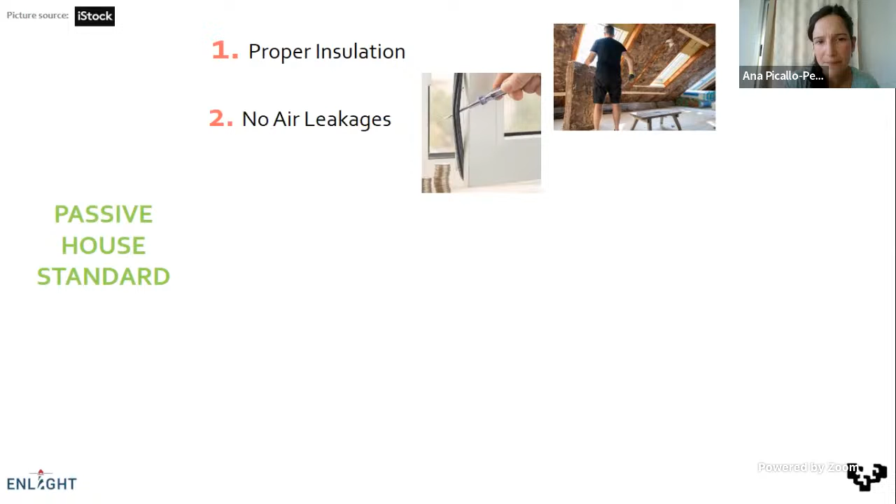It's a building that has very high, proper insulation, in order to decrease the heating and refrigeration demand as much as possible. It's a very compact building in order to control leakages or losses. There are no thermal bridges—thermal bridges are like highways for heat losses. So if you avoid thermal bridges, you don't have those kinds of losses to the outside.

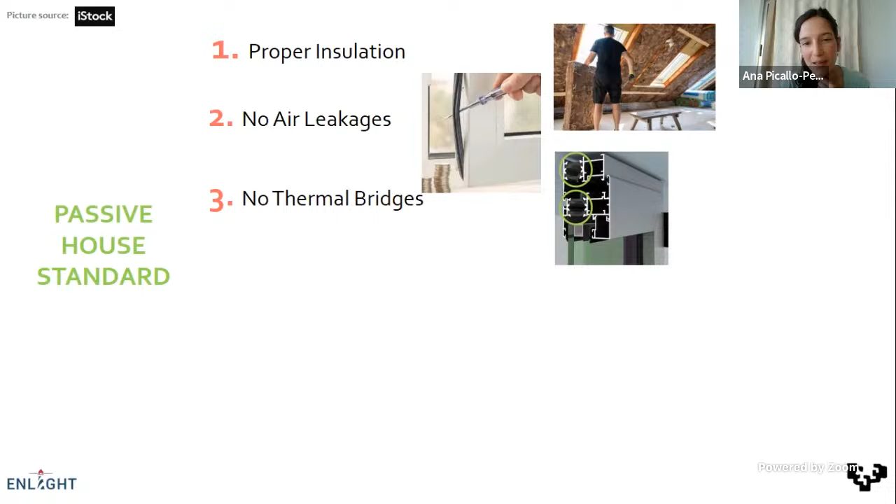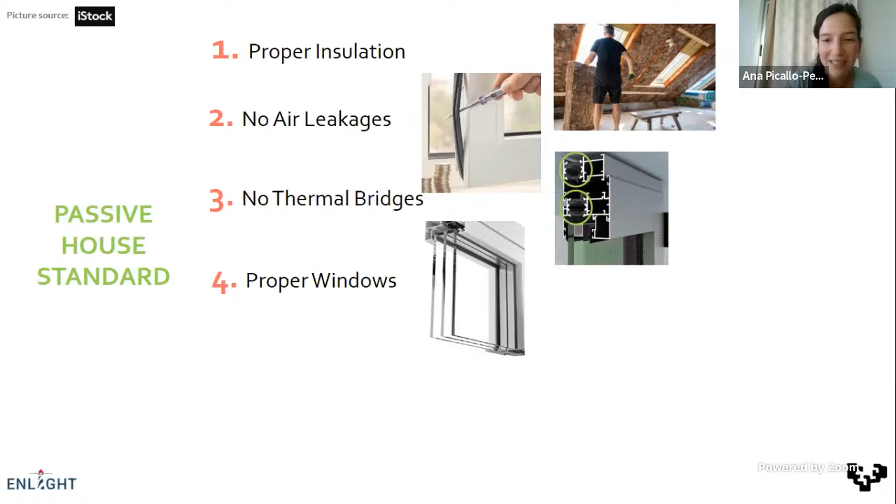Therefore, with the first, second, and third steps, we can have a building without heating and refrigeration demands. We also have proper windows, for example with 3 glass panes, in order to have as much sun radiation income as possible, but not losses to the outside, plus proper orientation.

It also includes heat recovery ventilation in order to recover the energy of the extracted air from the inside.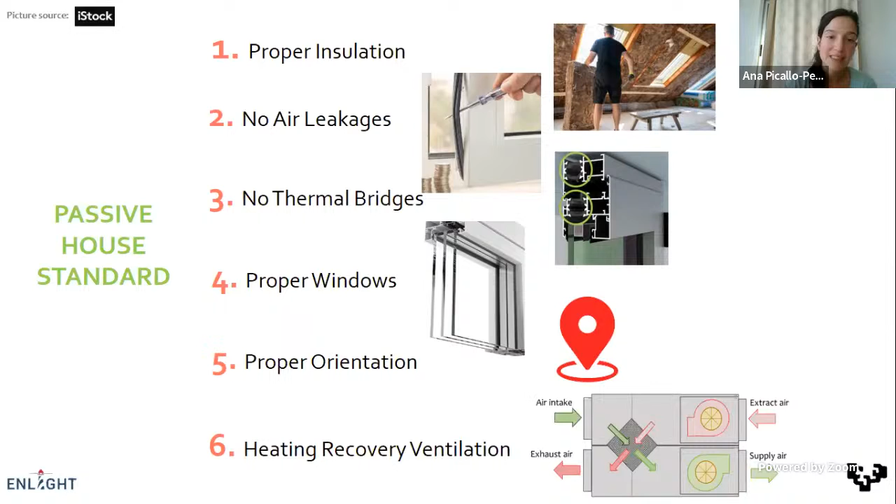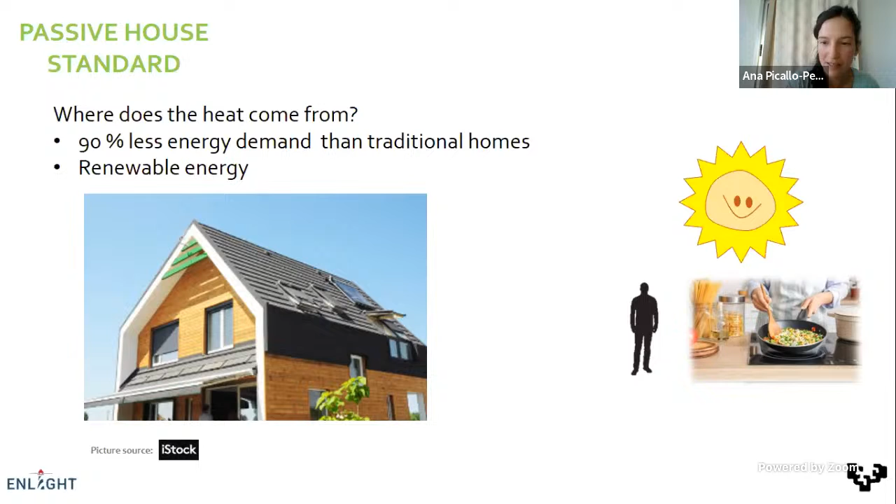When we have these 6 points in our house, we can decrease our energy demand by 90% compared to traditional homes. So the rest of the energy can be supplied by renewable energies in order to compensate the demand, and with internal gains inside the house, or solar gains, we can even compensate all the heating requirements.

These types of buildings are buildings from the present and buildings for the future, but what we need to do, as Rory says, is to decrease our demand itself and try to make the future of energy a little bit more positive. Thank you very much for your attention.